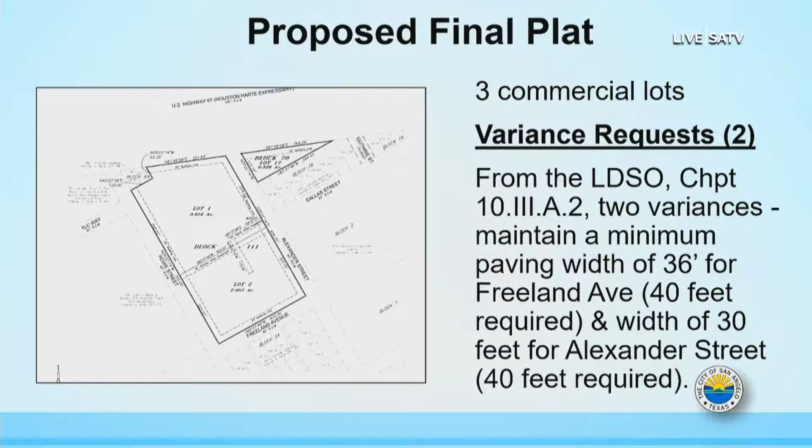On conformity to the comp plan and intent purpose statement, we do believe that this plat provides for orderly, safe, and efficient development of the city and creates streets for secure, safe, and functional systems. A little rationale on the variances: we are recommending denial on the variance for Freeland Street. That being said, installation of a 4-foot sidewalk along Freeland would satisfy city standards, and then no variance would be required, and it would provide a connection from the school to the nearby park and the neighborhood. We are recommending approval on Alexander. It is curbed and guttered, and neither a sidewalk nor widening it would provide any further benefit for the school nor the neighborhood.

City staff recommends approval of the first replat of Hatcher Edition, subject to 5 conditions of approval, denial of the variance for Freeland Street, and approval of the variance for Alexander Street.

Subject to the 5 conditions: the tax cert, submit a drainage study, which we have agreed with city engineering could be deferred, and construct Alexander Street to city specs or seek a variance, which they have.

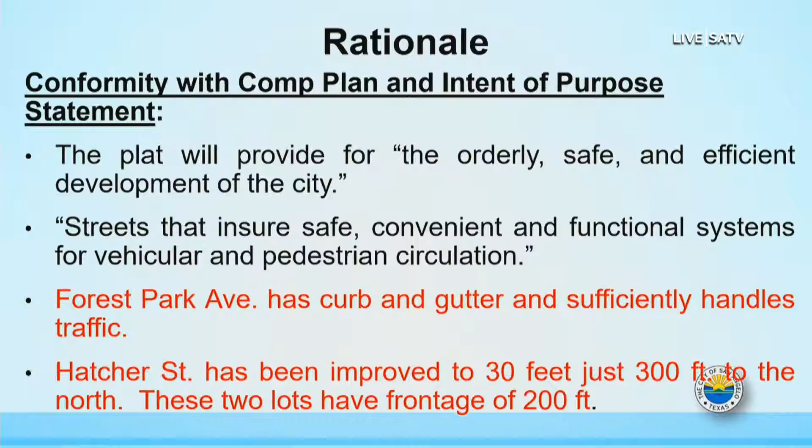Staff is recommending approval of the first replat on Tract 10 of Forest Park Addition with 4 conditions of approval, and denial of the variance for Hatcher Street, but approval of the variance for Forest Park Avenue. The conditions are: a copy of the tax certification, to install water and wastewater service lines to the new lot, to construct Hatcher Street to city specifications or seek a variance, to construct Forest Park Avenue to city specifications or seek a variance, and to submit plans and install sewer main and connections.

Again, I think that's a combination of slides on this. Sherry, could you go back to the aerial real quick so we can look at Hatcher one more time? If I could just stop for a moment. Go to the aerial real quick. One more.

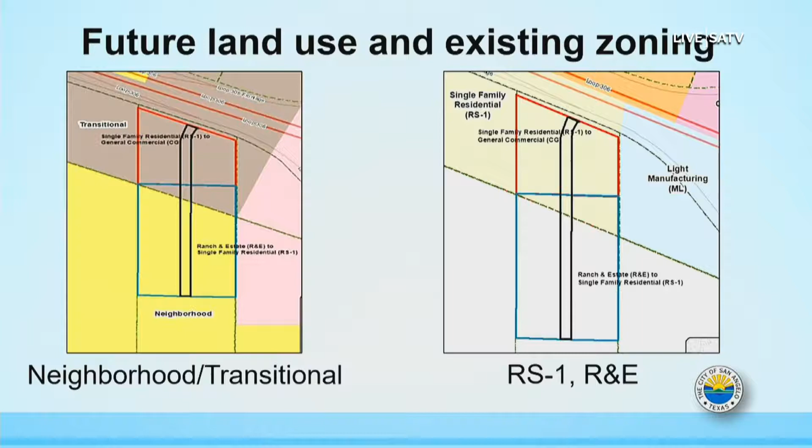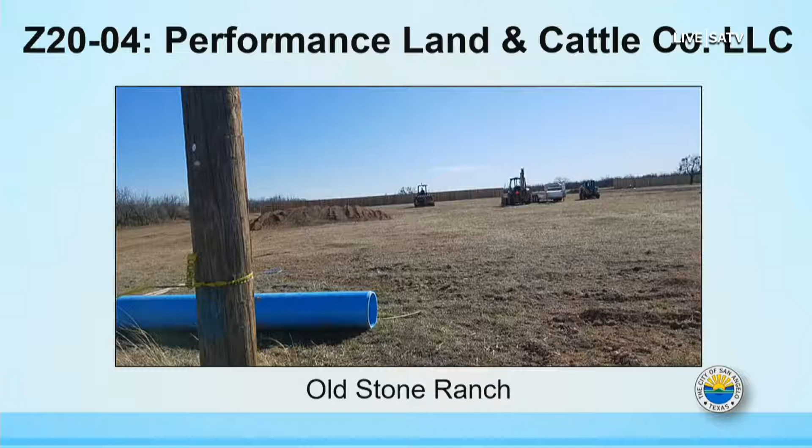This is just a picture of where they are in the process. Where that fence is in the back is where the residential property starts. The property in the front is the commercial.

We sent out 4 notices, received nothing back, either in favor or opposed.

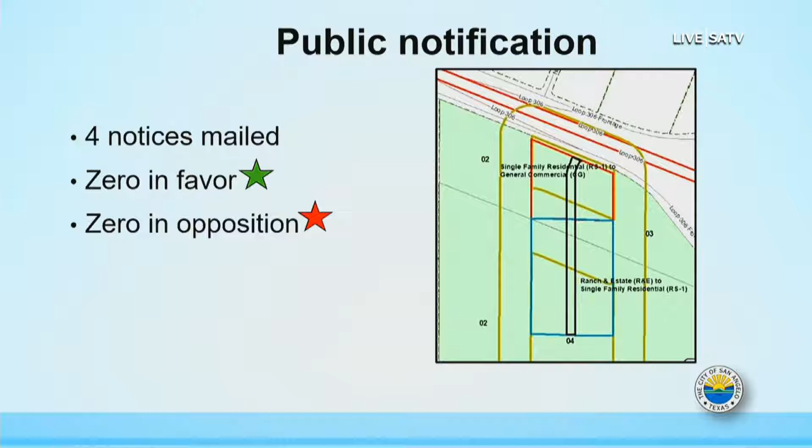We've gone through this many times on the comp plan. This is compatible with the designation of the comp plan, is consistent with everything in the zoning ordinance, and what they're proposing will also be consistent. It is compatible with the surrounding areas in that commercial on both sides of this property is general commercial, so the CG will be consistent with that.

The change of conditions in this case is the property is being annexed into the city. That annexation will be completed. It comes in as ranch and estate, but because of the half-acre lots, which does not meet ranch and estate, it is asking to rezone to RS1.

Rationale for approval: at this point, there's little or no adverse effect on the natural environment or the community. The demand for housing is part of the recent study that was done, and this fits a rather unique concept in that it's half-acre lots, not acre lots, but it is the larger lot for people who want a larger garage, storage unit, or shop on the site. The parcel is consistent with the development patterns already established in the area, and staff is recommending approval of all the rezoning.

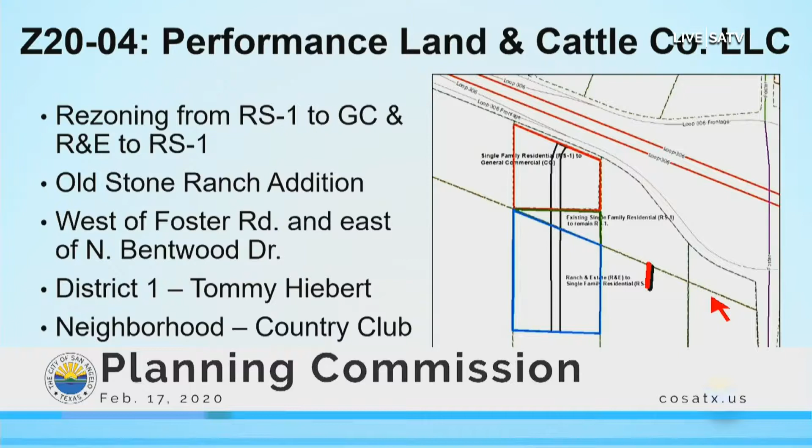So, in order for Mr. McLaughlin to develop his properties here and here, with the sewer line here, and they're not going to use it, all of these properties back in here, how are they going to develop without sewer? I just don't think it's in the best interest of the city to start allowing septic tanks when this is in a district where sewer upgrades are happening.

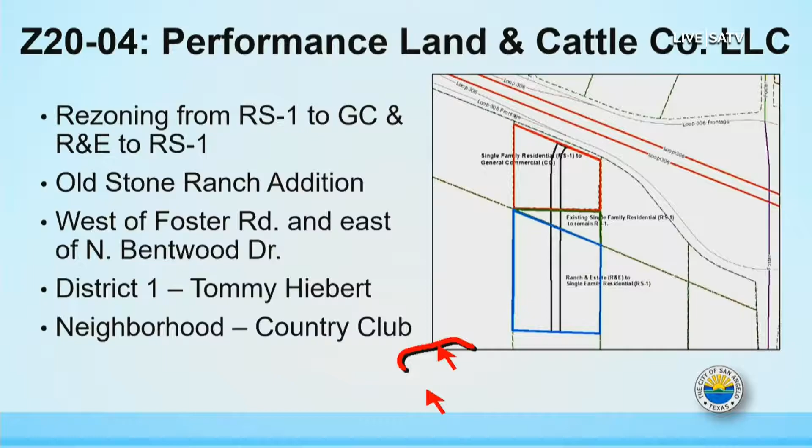And all of Bentwood is in here and there's sewer there. So if they want to put houses right now, then they should be zoned R&E, which is what their subdivision says anyway. Right, and do 1 acre lots and put septics in. We don't have a problem in theory with residential and commercial development, but not under these circumstances with septic tanks and half-acre lots, and septic for the commercial up front. That is not good planning and good policy.

Thank you. Thank you, Mr. Eustace. Anything else, Travis? Anyone else have questions?

Good morning, Russell with SKG, also kind of representing Performance Land and Cattle in this case. And I'll tread lightly here. I'm good friends with Mr. Eustace and do work with him.

So really, I want to answer this more on a factual basis. As kind of working as the engineer for Bentwood and their development and working with the city over this Bentwood lift station and all the development that's going on, Bentwood, Tigris, and another developer in Bentwood are spending $250,000 of their own money to help upgrade this lift station in Bentwood. The lift station at Bentwood, they're upgrading it to effectively the maximum capacity, putting as big a pumps as we can put in there for that existing 8-inch force main, which is -- they say there's a sewer line, but it's an 8-inch force main that's now going to be at capacity.

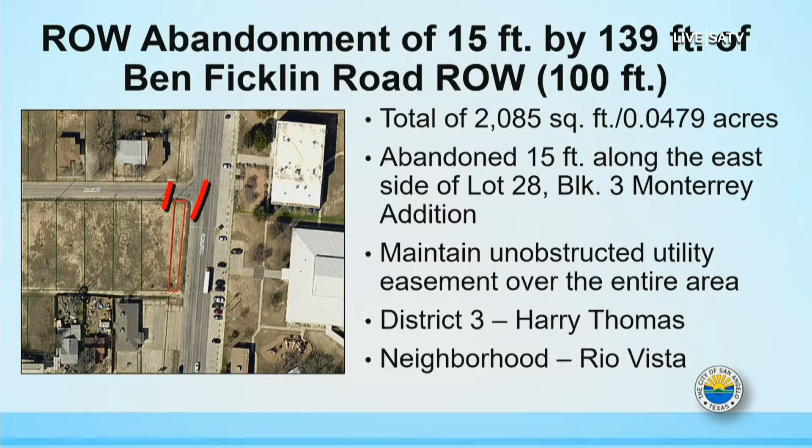This has gone out to the surrounding property owners, and it was sent out to all of the city departments. We did hear back from operations, who gave us a list of recommendations, and the unobstructed easement was the one that they recommended most.

They also suggested that it could go down to 12 feet because they have some private utilities in there that they're not exactly sure where they're located, and there are plans for Frontier to extend some more. But their main recommendation was that if they go in there, the fencing will have to come down, and the city will not be responsible for putting the fencing back up, and the applicant is aware of that.

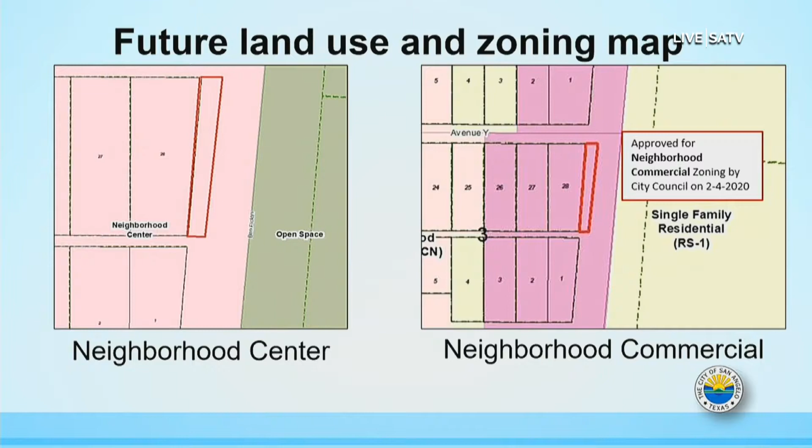There were two other areas where such a right-of-way abandonment occurred. One was a block south for the Dollar Tree store, and one to the north where a right-of-way abandonment also occurred at about the same width.

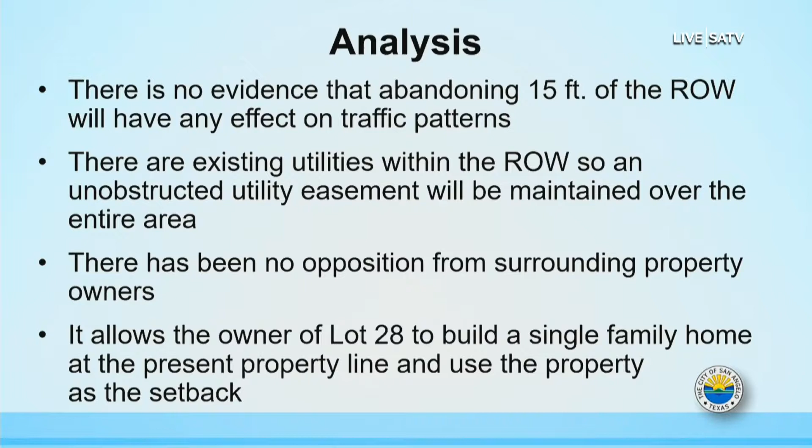In analyzing the request, we looked at the fact that we do not believe this 15-foot abandonment will have any effect on existing traffic patterns. It's all undeveloped property at this time. Because there are existing utilities within the right-of-way, the unobstructed utility easement will be maintained over the entire area, and the applicant is aware of that. There has been no opposition from the surrounding properties, including the school district, which was notified.

In this case, it allows the owner of Lot 28 to establish the building line right now at his east property line. Staff is recommending approval of the right-of-way, subject to 4 conditions of approval.

To remit the payment for the assessment formula outlined in the fee schedule that is consistent with the city code. Verification of the recordation of the quitclaim deed officially abandoning the city's claim to the entirety of the abandoned alley shall be provided. And then to submit, obtain approval of, and officially record a subdivision replat which absorbs all of the property into Lot 28, which will be the only lot involved at this time. And as part of the replat, again, the 15-foot unobstructed utility easement.

Are there any questions? Nope. Thank you. I open it up for public comment. Anyone wish to speak on this case, please come forward. I'm going to close public comment.